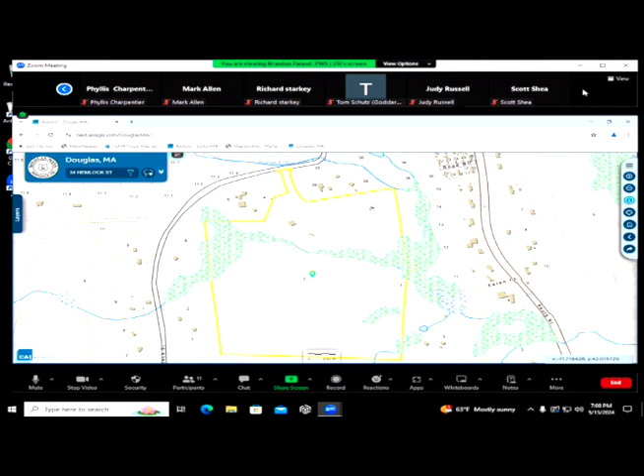How much frontage does it have, Matt? And do you know if it's subdividable? It does not contain legal frontage for a developable lot. It does have a wide enough width at its entrance to become a subdivision if someone wanted to put a road in and then carve off additional lots through a subdivision control process to the planning board. Wow. Looks like at least 50 feet then, right, for a road in? Yeah, there's no room to create any more ANR Form A lots. Yep, gotcha. So if they're going to do anything, they'd have to bring in a road. Correct.

Mr. Chairman, can we ask that everyone speak up a little bit or use the mics better? And also, I'm wondering if you can see a satellite view. Sure.

It will be over here. So move that. Hit the three lines. And hit base map. Hit local. That one right there. And then hit 2021. There you go.

So we show them where we were sitting, right at the top, where we took those pictures looking in, as far in as we could get. That's a huge piece. So a lot of it's wooded.

If you go back to the wetland map that showed the wetland straight across, what somebody could do is come in with a subdivision road, propose to do a crossing, and maybe have some house lots in the southern part and some house lots in the northern part in the field, all subject to wetland delineation and all that, to see what the true extent is, but that's what could possibly be done.

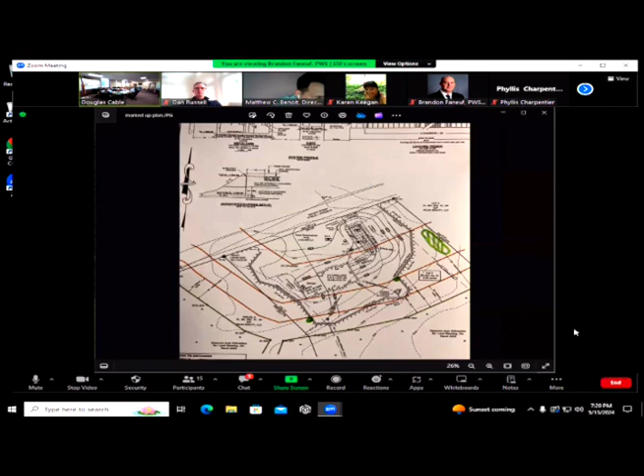Thank you, I will inform the builder. Appreciate it. Yep.

Do we have anything for the open session? What I'd like to do right now, I see some folks are online for 75 Old Farm Road, and they continue tonight, so you know.

Can't hear you, I'm sorry. What did you say? 75 Old Farm Road is asking for a continuation. Until next meeting, which is one week from tonight. Okay, thank you. You're welcome.

Did they ask for a continuance to the 20th meeting or the June meeting? They didn't specify. The 20th is just for enforcement items. Oh, that's right, sorry Rebecca, it's the first June meeting, June 3rd.

At the next meeting, could I be given privileges to share documents? I'm not quite sure, it seems like it's blocked. Next meeting is for enforcement issues only. It's going to be on the 20th that we hear this case. No, it'd be June 3rd. Yeah, the May 20 meeting is going to be enforcement issues only.

So the next meeting for this would be June 3rd for the continuance. Okay, all right, thank you.

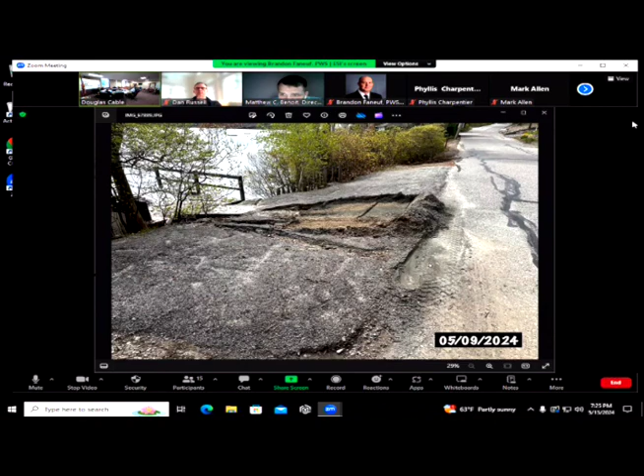So I can unilaterally issue an enforcement order, which I did. However, it's not official unless and until the commission ratifies it through majority vote. So to me, you can see what it looks like here. In fact, any chance you can go to Google Maps, Samantha, and show what it looked like before, with street view? I can share those and the old photos from the order of conditions if you wish. Yeah, I can do that. Go ahead, Matt, that'd be great, that'd make it easier.

Joe, it's in the front of your notebook. The order of condition, it should be in the front, yeah, in the front sleeve. Oh okay, that's what I looked for. Oh, you got it right there? Thank you.

I got it, can you see this picture? Not yet. Yes? No, no. Okay, let me get this screen sharing. Let me correct this, hold on.

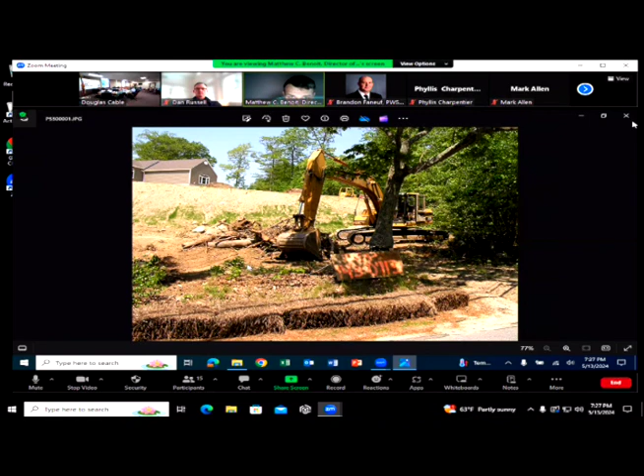Just gonna share my whole screen and then pull up the photos. Here's a screen, here's one of the photos. This was the driveway having been removed back in 2006 per the enforcement order issued by this commission. Driveway was put in and this was the driveway removed. And now, as you've seen from Brandon's image, they have reinstalled the driveway again. And right across the street is Whitin Reservoir, and that's where we have our problem.

So, this was last July, as in its existing state, and then as you saw with Brandon's image, they have done tons of work over here and absolutely changed the landscape of the order that was originally issued by this commission. This is blatant disregard of an order given by this commission several years ago by the same property owner. And I think an enforcement order is definitely in order for this.

Did they ever get a certificate of compliance for a previous order? I think it was an enforcement order, it wasn't an order of conditions. Okay.

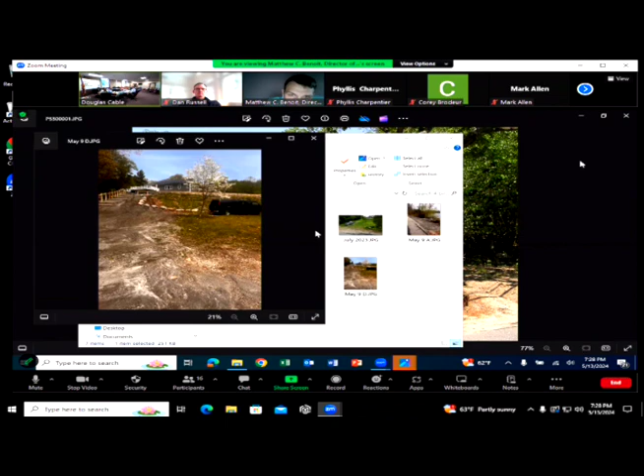That's how it used to look last summer. So, that's all I have to share for now.

I'm sorry, there was an order of conditions issued for this. I don't believe a certificate of compliance may have been issued, but I can check on that. But one way or the other, there was activity by this commission with regards to this exact issue, and now it's back by the same property owner or his heirs. I'm not sure, it's hard to tell because now they have a trust, so it's tough to tell.

And this washed out across the street, and I took a call from an anonymous abutter who was concerned about the washout that took place the night before. So I saw this myself. Yeah, that's one of my pictures, and it's pretty blatant.

I would recommend ratifying the enforcement order, and at the moment the only order is for a cease and desist. The question is, from here, do you want them to try and file a notice of intent for this? Is this something you would even consider approving? Or would you feel better just having them restore it, because you have that right?

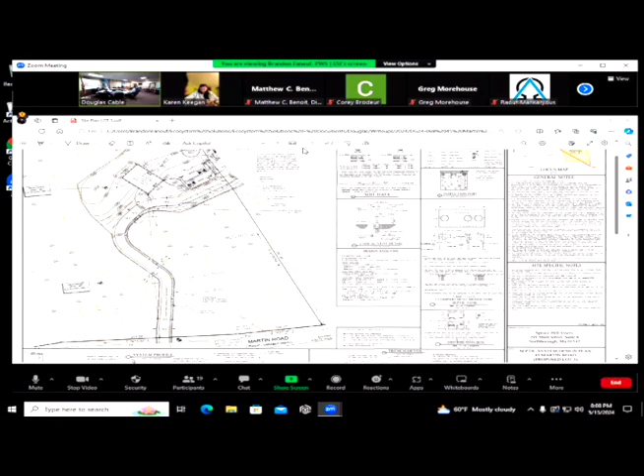I will say that the area where the driveway is threading the needle between the two lobes of wetland is about as close as you can get to being a wetland without being a wetland. I call it a moist land. I don't know how you can build a driveway in there without raising it. It's impossible. I would tend to agree, you'd have to do something there. The soil samples taken were about as close to being a hydric soil as you can get without actually being a hydric soil. It has all the requisite wetland plants, but it's one chip away from being a hydric soil.

Yeah, I thought it was like a pine grove in that particular area. True, the pines have buttressed trunks, and you see hemlocks in there, which is actually a FAC wet plant in Massachusetts, even though nationally it's FAC up. And I see pine trees in wetlands all the time.

All right, well, we'll reevaluate the location of the driveway, and the engineers will come up with some wording, some documentation on how they're going to be able to create this driveway in this particular area. That's engineering.

There seems to be a lot of grading of the esker on the pond side, up and over the top of the hill. Yes, that's one of the reasons why I'm so concerned about DEP's comments, because they're going right up to the 25-foot mark. And if it ends up being riverfront area at all in that area, then it changes from 25 to 100 feet. And that's not just under the bylaw, that's state law.

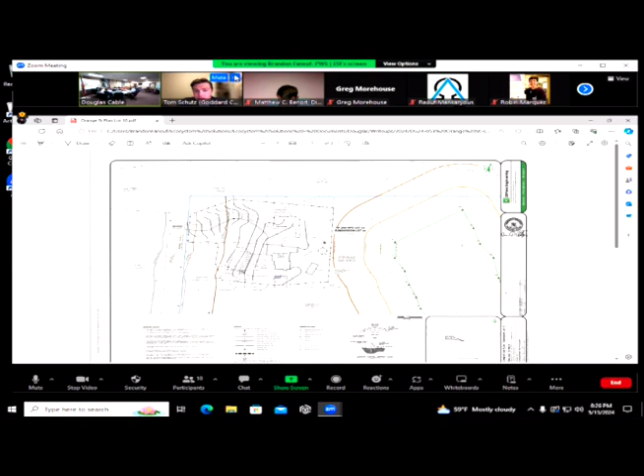Yeah, Mr. Chairman, I am on Zoom. This is Tom Schutz from Goddard Consulting, who is here on behalf of the applicant tonight. Okay, Brandon, do you mind if I share my screen? I just have a colored-up presentation of this site plan that might make it easier for the commission to view.

Can we give Mr. Schutz sharing capabilities, please? All right, everybody, can everybody see my screen? Yes. So again, Tom Schutz from Goddard Consulting here on behalf of the applicant at 0 Orange Street, Lot 10. Currently, if we look up in the top right corner, it is a forested, non-developed lot.

It is not within 200 feet of a perennial stream shown on the USGS map, and we'll move on to the resource areas in a second. Here in the red outline is our property boundary. To the eastern section of the site, we have a bordering vegetated wetland that is actually on site.

The yellow line here is the 25-foot buffer zone. The orange line here is the 50-foot buffer zone, and the red line here is the 100-foot buffer zone for the on-site wetland. Additionally, we have Orange Street, which runs adjacent to the site, and another off-site BVW system that can't be seen currently on here.

It is not flagged as part of this application because it's not part of the property or ownership group, but we did add the buffer zones to the plan accordingly. The yellow here is the 25-foot buffer zone, the orange is the 50-foot buffer zone, and the red is the 100-foot buffer zone.

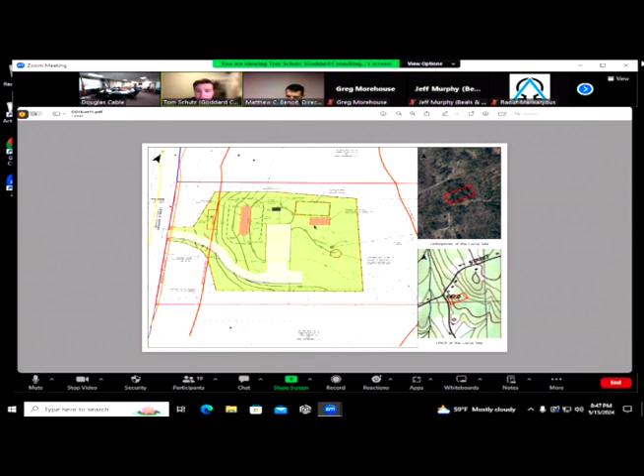Just like the last site, we have a BVW system located off-site across Orange Street. So we have the 25-foot buffer zone shown in yellow off-site. We have a small portion of the 50-foot buffer zone shown in orange in this vicinity, and then the 100-foot buffer zone shown in red in the western portion of the site. The applicant is proposing a 4-bedroom house located directly in the center of the site, outside of the buffer zone. We also have a dry well located to the east of the proposed house, and a stockpile area just to the north of the proposed dry well.

To the west of the proposed house, we have a septic system. In this case, the reserve area is actually going to be located within the 100-foot buffer zone, due to the well radius located where my cursor currently is. Just like Lot 10, we will be having a portion of the driveway within the 100-foot buffer zone. The driveway is going to have an associated stone infiltration trench located on the southern side of it. I'd like to open it up now for questions from the commission.

Same comments? Yeah, I think we're dealing with the same comments as we did for Lot 10. In this case, we only have a really small portion of the 50-foot buffer zone right next to the western property boundary. Would you like to see any plantings there? I just think that's a really small portion to even be putting any trees if we're trying to put them 8 foot on center. Well, then you probably only have to do one row and make it easier. Okay.

Mr. Chairman? Yes. I just want to point out the commitment from the property owner in the previous hearing to continuation of the stone walls to be added to the plan and reconstructed in the area where the driveway opening is. Okay, thank you. That's really important, and if the plantings are to be consistent, if they're running from Lot 10, just continue that line right down Lot 11. Okay, yeah, that certainly makes sense to keep it going right south and connect it into this property as well. And just show the stone walls in the plans. And Mr. Chairman, if I may ask another question.

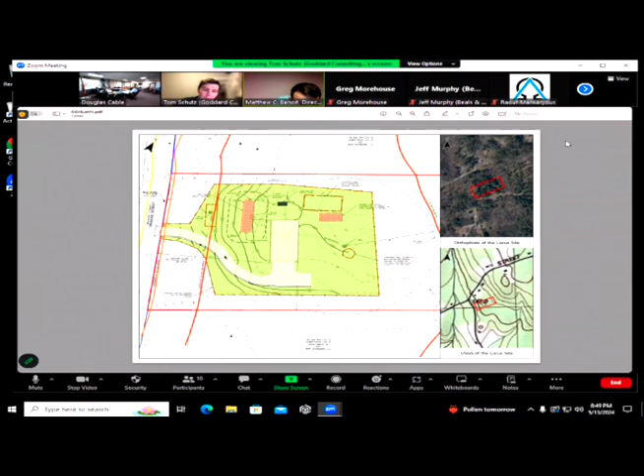This driveway slopes down towards Orange Street, because there's a large slope here. What additional stormwater, in addition to the trench, do you have to capture the water from getting into Orange Street? So it's just the infiltration trench at this point. We did submit stormwater management plans that show we're not going to be releasing any additional stormwater beyond existing conditions. So we're not expecting any additional stormwater into Orange Street, and the infiltration trench will certainly help with that. Additionally, we have a dry well towards the rear of the property that's going to manage stormwater from the proposed 4-bedroom dwelling as well. We're not anticipating any stormwater being added to the site beyond existing conditions, and that is shown on the stormwater management drainage calculations.

And Brandon, that's to be part of your peer review, correct? Yes, thank you. Sorry, Mr. Chairman, that is all I have.

That's okay. Anything from the board? I would ask that you indicate whether the driveway is to be gravel or paved, as with the last lot. Secondly, there's a sharp drop-off into Orange Street, it appears. Orange Street looks to be at elevation 481 or 482, and your last contour is 486. So can you explain how you're going to work that quick drop-off into the road?

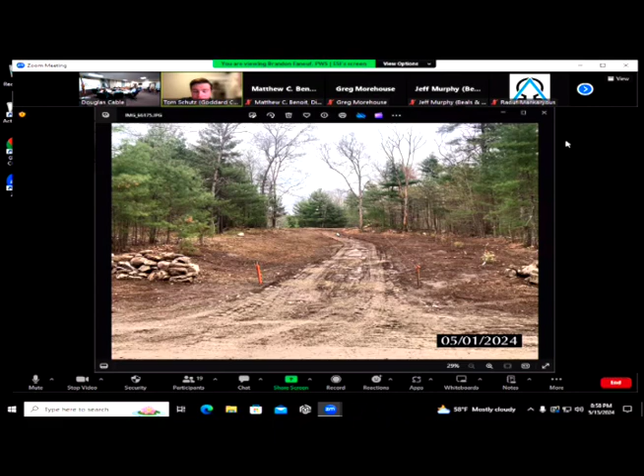We have tickets. I have a picture of the seeding too, Brandon, that I just took right after it got put down. If you'd like, I can share my screen quick to show you that.

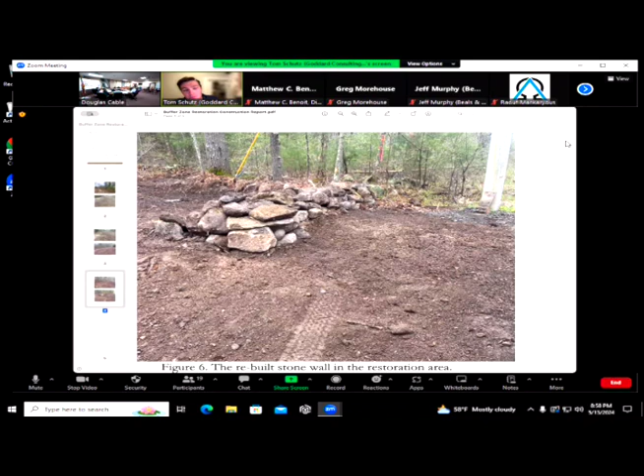So this is on the right-hand side of the driveway that was restored. You can see the seeding that was put down. All of this here is seed that was put down. It's wildlife conservation seed mix.

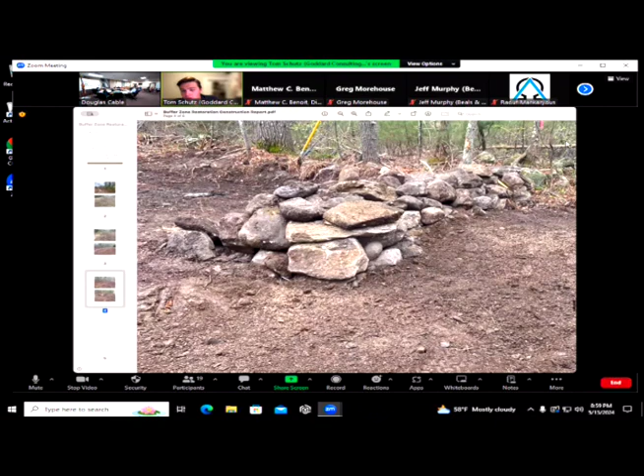You can see it spread especially close to the edge of where the wetland is, back in this vicinity. So the whole area was seeded with conservation seed mix. This is just a photo of it. So it definitely was seeded with 2 pounds of seed mix.

Yeah, we saw like a clump or two of that seed mix, but I didn't see it throughout. That's my only comment. I would have expected to see it look like that everywhere, and I just didn't.

Yeah, and if we don't have the 75% herbaceous layer that we specified within our restoration plan, we can certainly add more. We'll let the seed come up and see if we need to add some more. That can certainly be worked out.

I'm okay with that, if you're okay with that, Mr. Chairman. At the moment, we have tickets that have been sent and delivered to New Sherborne LLC and to the Uxbridge District Court, going from April 1st to May 1st. So they've got 30 days of fines at $200 a day, which is about $6,000 worth of fines under their belt.

I think they did the work on May 1st, so we suspended it—not that we meant to suspend it, but we ran out of tickets. So that's what we're dealing with right now, because we're writing so many for CRG, we ran out of tickets.

Can you just confirm the seeding rate? You say it was seeded with 2 pounds. Is that 2 pounds per 100 square feet, 2 pounds per 1,000 square feet, or 2 pounds per acre?

Right, yeah, let me just pull up the spec sheet quick. It was 2 pounds, and it's designated as... all right.

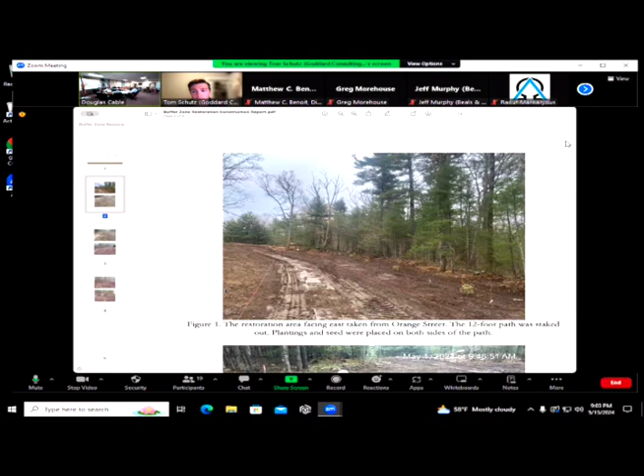So I don't recommend lifting the enforcement order until everything has been confirmed to be growing. What I would recommend doing at this time is suspending the fines retroactive to May 1st, which is when they did the work. And if we find that they didn't do the seeding, you still have the enforcement order, so you still have the ability to issue fines again if you think they're not being as forthright as they should be.

Correct. Yeah, I like that. Yeah.

Okay, need a vote on that, right? Yeah, so there would be a motion to suspend fines retroactive to, let's say, May 1st, since that was the last day. So you make it retroactive to May 1st. Say May 1st, because that was the last day. Yeah, it's the last day.

But continue the enforcement order, right. So moved. Second? Motion made and seconded to continue the enforcement order but lift the fines as of May 1st. Roll call vote: Mark Mungem, Jim Foran, aye. Josiah Birch, aye. Joe Fitzpatrick, aye.

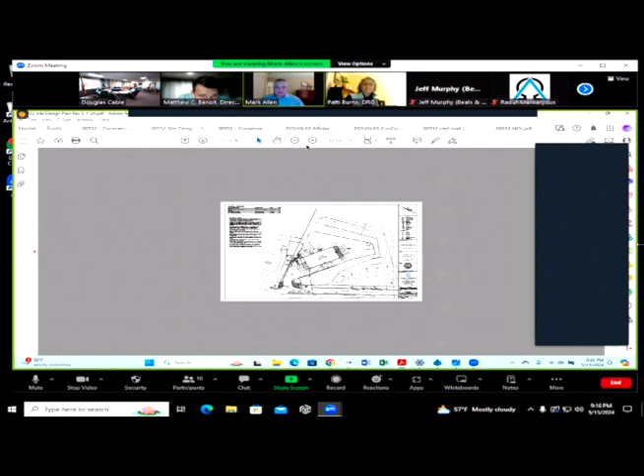So here is the revised site plan. I'll go to the most important sheet, the grading sheet. Some of the significant changes are along the gas line to the north of the site. Instead of a one-to-one riprap slope treatment, we tightened up and eliminated some of the paved areas around the gas easement. We brought it in about 8 to 10 feet from the gas line to the north and about 5 to 6 feet from the gas line to the east. That allows us to do a more gentle, easier to maintain 2-to-1 slope throughout the rear of the property.

We've also added 3 tiered boulder or landscape modular concrete block walls to the rear. That's a significant change, and it will reduce the amount of fill that will need to be taken off-site.

The other big change to the project was the removal of the stone gabion basket drainage basin, which was in this location, and we've replaced it with a more standard grass open-air stormwater basin that will have 3-to-1 slopes and 2-to-1 slopes inside. We did maintain the Cultec chamber system to take the rooftop runoff, and that is still in its same location.

We tightened up the area of disturbance within the buffer zone, and the removal of the gabion baskets allowed us to pull this limit of work up about 10 feet. You can see the 25-foot no-disturb zone line is not right at that line anymore. And the septic system location is here, as opposed to previously where it was earmarked for this location. So we feel this has been an improvement from the last application, both stormwater-wise and in area of impact.

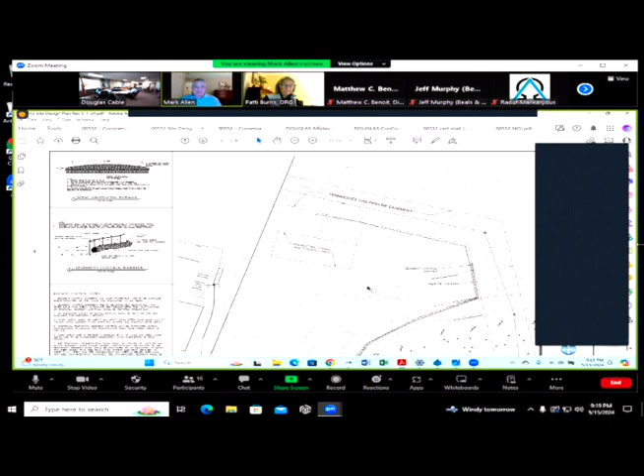Other items are fairly standard, just the revised details. The new drainage basin cross-section has been added. There were some plants added to the planting plan per comment. Some of the vegetation along Davis Street outside the buffer zone—the planning board wanted 2 more street trees planted in that area per the bylaw.

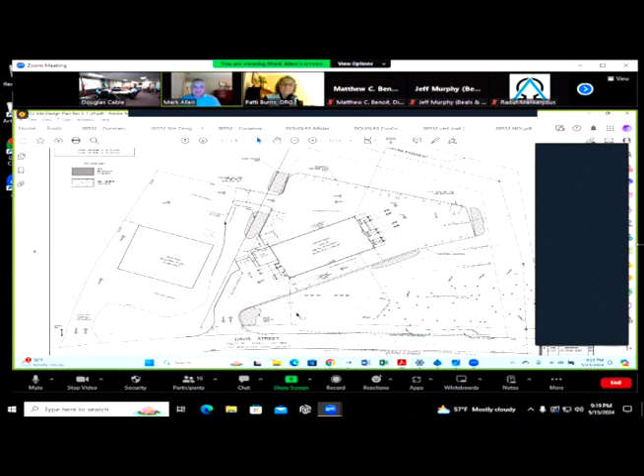And that about wraps up the changes. Not wholesale changes, but significant changes.

Board have anything? I have a couple questions. Thanks for that review, that was good.

Is the detention basin meant to infiltrate water, or is it merely to hold back water and then empty into the wetland? No, it is actually designed to infiltrate. Both the rooftop runoff will go into the Cultec system, which has a component of infiltration, and whatever doesn't infiltrate will then discharge into the open air basin, which takes the catch basin drainage and will also infiltrate through the bottom of the basin. The peak flows and volumes post-construction will be less than the peak flows and volumes pre-construction.

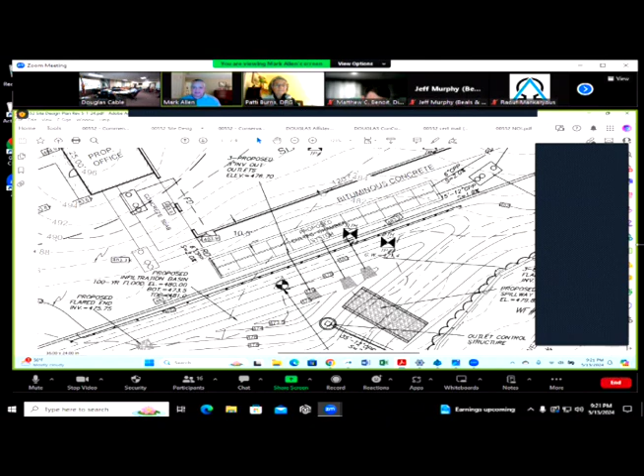Okay, and what are the soil conditions there? Have you done soil tests to know that this water will infiltrate into the soil at that elevation? Absolutely, we've done a series of testing. I'll zoom in here. We did a few tests in the building area and a few down in this area where the infiltration basin and the Cultec system are, and they had very rapid infiltration rates. It's a loamy sand to sand.

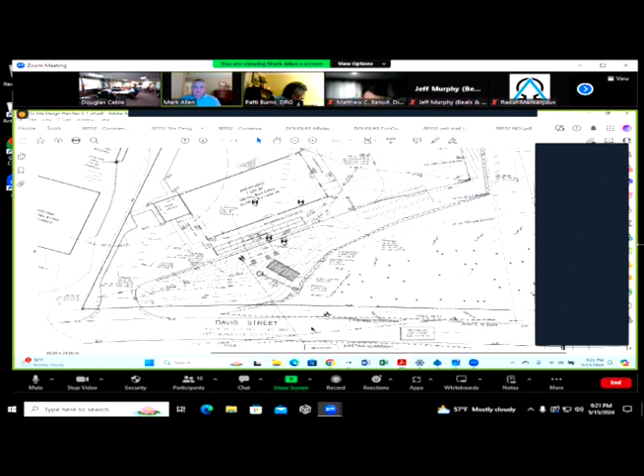That soil analysis is in the drainage report supplied to Drainage Engineering and is being peer reviewed, but we did have very good soils in that location. Okay, and have you provided a construction sequence plan? How will these infiltration basins be brought into use and not be impacted by the construction of the site? Absolutely, that's part and parcel of the drainage analysis report. It's also reflected in what we will file as a national EPA construction general permit, where all of those construction guidelines will be outlined. We can CC the commission, as we have in the past with other projects, so you can take a peek at those detailed procedures.

So from a layman's standpoint, how will this be built? Will the grading at the back be completed first, or will the detention basin be completed first and act as erosion control during the process? How do you propose to move forward with that?

Sure. So what we'll do is, obviously, all the erosion control measures will be put in place. Prior to any tree removal or stump removal, we will have inspections done by the commission and ourselves, and follow the construction process, at which time temporary swales and collection areas will be designed, not within the area of the drainage system, but up gradient of it during the time that the gas easement area grading and retaining walls are being built. It'll work from north to south, so we'll do all the work outside of the buffer zones to the north and bring the grade down until we hit slab elevation, then shape up the area coming to the south towards Davis Street.

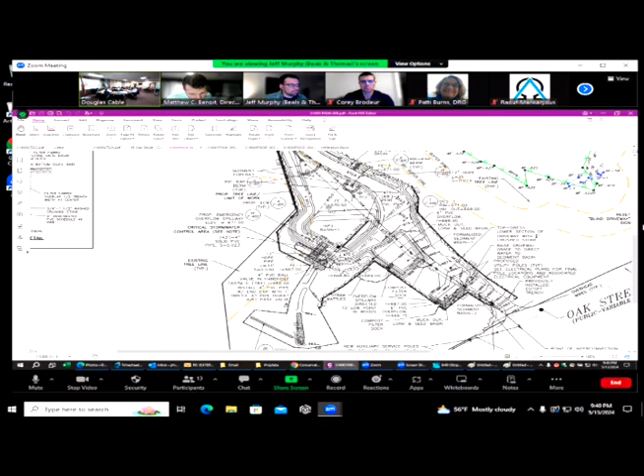Right now we've done the repair work to the clay core that was called out in some of Haley Ward reports. It looks like that's working now. We've installed the pipe through the berm, reinstalled the wick drain through the berm. Today they finished redoing the outlet, riprap, and swale to direct the water so it all goes into the swale and infiltration trench. That work's been completed as of today. They still have a little bit more work on the gravel floor. They installed the bottom up, but they need to keep going up east and complete it. I confirm I went there around 4 o'clock today, and I can confirm those things have been done as well.

It looks like you also extended the riprapping on the toe of the slope of Basin 1. Yes, that's where they added a little swale to convey the water better, away from where it was getting wet at the bottom.

One thing I'd like to add is that they redid the impervious clay core to Basin 1, and I took a sample and let it dry, and it is solid as a rock. I was going to bring it in tonight for everybody to see, but I made the mistake of allowing my teenage sons to use the truck to bring stuff home from their dorm room, and it disappeared. I was actually pretty surprised by how solidly that sample dried up.

And that was from the site? So, again, where do we stand? Basin 5's done, Basin 1 done with assent between the two engineers that issues have been addressed, and that the changes being requested are, in their minds, minor. So the planning board agreed last week the changes were minor, so the same motion is being placed here tonight for the Conservation Commission's consideration.

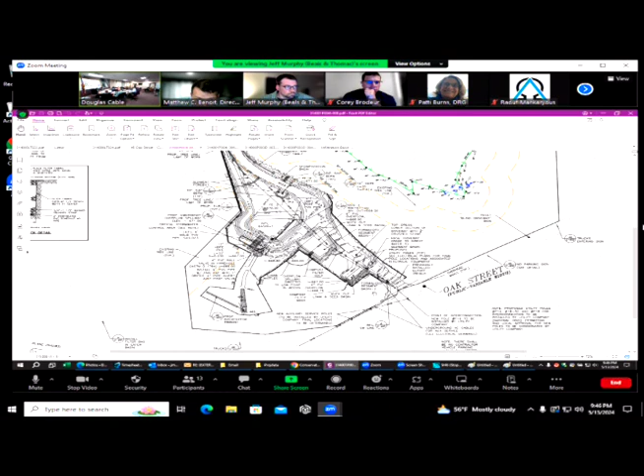So is that the infiltration basin 1? Could have pretty good eyesight to be seeing those. Look at this one here. Yeah, this is infiltration basin 1, sediment basin 1 and 2. So you added these? Yep, so those have been there for quite some time. We're just making it permanent at this point.

Tell me if I'm out of line, Corey. There's sediment basins that were not called for in the original plan, correct? Correct. Right, and that's why they're asking for a minor change, right? Correct. But there are 2 additional basins, and that's a minor change?

That's for the commission to decide, I agree. That's what they need to vote on. The other option is, well, there's two other options: an amendment to the order of conditions, and the extreme side of that would be, it's so different than originally proposed, they need to file a notice of intent. Those are the options: minor field change, amendment, or new notice of intent for your consideration.

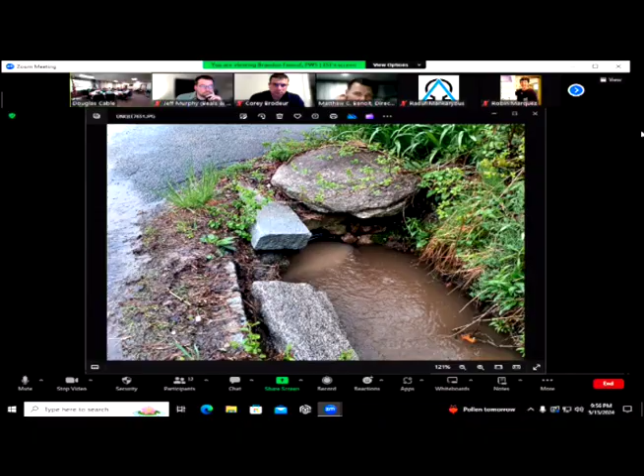Winter. Something for them to see if they can correct, that's all. Well, at this point, I think the conservation is pretty much at a point where the things we've asked for have been taken care of, with the exception of that entrance. So I would entertain a motion that we allow them to continue with the fourth phase, but the entrance has to be taken a look at and corrected in the meantime.

Mr. Chairman, do you want me to provide that motion again? Yeah, there's no other questions on that? From Zoom, main floor? Yeah, if you could, Matt.

Sure. It's to recommend authorization from the Conservation Commission to permit the 45 Oak Street solar project to move forward to phase 4, provided all amendments, provided that the peer review consultant from Haley Ward verifies that ongoing construction modifications of Basin 1 are installed according to the revised plans, which include but are not limited to returning Basin 1 to finished grade, loaming and seeding in Basin 1, and continued maintenance of the construction entrance to prevent silt from exiting the site.

Move a motion? Yeah, so moved. Second. Okay, motion's been made and seconded.

I apologize, to amend the motion, I believe they're doing a review of the seeping of Basin 5, and they're providing us an update on that as well. Okay, we're good, Mr. Chairman, we're good. Okay, so motion's been made and seconded to allow you to go to phase 4.